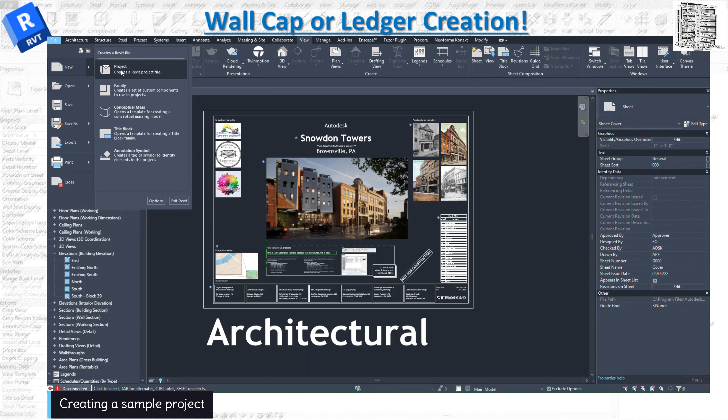Let's start by opening a new project using a template. Let's wait until it gets opened up. This is just a regular thing - I want to have a floor and a wall on top of it, just something very simple. I'll use just an architectural floor, a generic 12-inch floor.

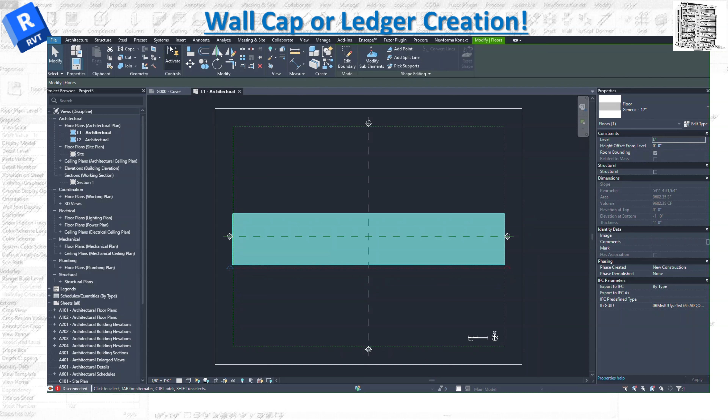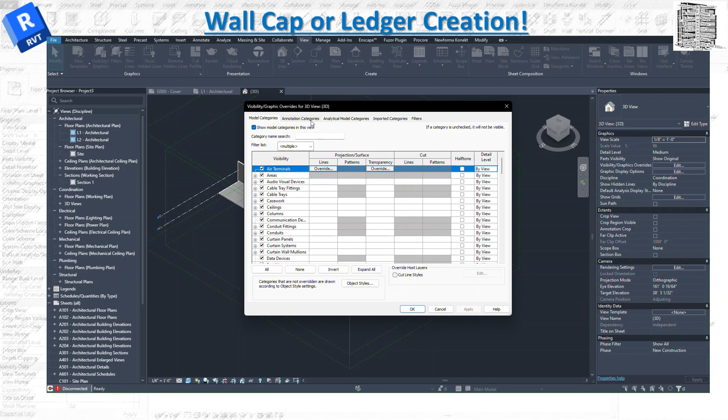I want to go to the architectural tab and get a generic wall, like an 8-inch wall, and put it right in the middle. This gives me the shape of the wall and the floor we can use, and you can see it in a 3D view how it's going to look. I can go to shaded view, so you can see the floor with the wall. If you don't want to see any annotations or scope boxes, you can uncheck the box to remove the annotations for a clear area.

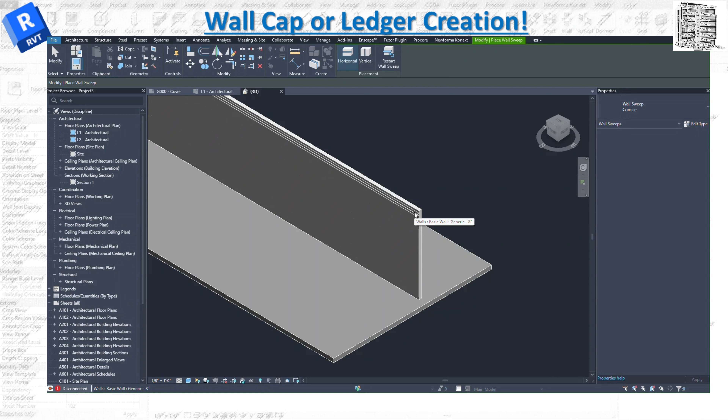After that, I want to go to the wall sweep. The reason we can use this, if you have a straight wall, is it's easy - you can use the modeling place to add some capping to the wall, which is easy for a straight wall. But I want to give you a tip and use the roof fascia to basically create the capping.

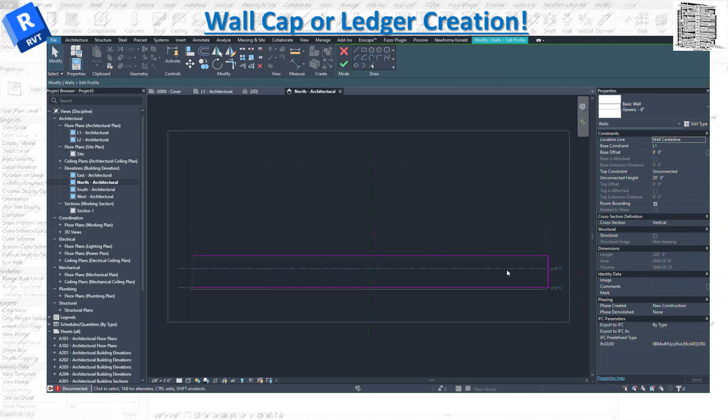Right now I want to show you how to create basically a sloped surface or wall. I can go to one of the elevations, select the wall, and edit the profile. If you want exact dimensions, you can get those, but it's really easy here - I just draw this line and delete the other ones. Pretty easy, so there you go.

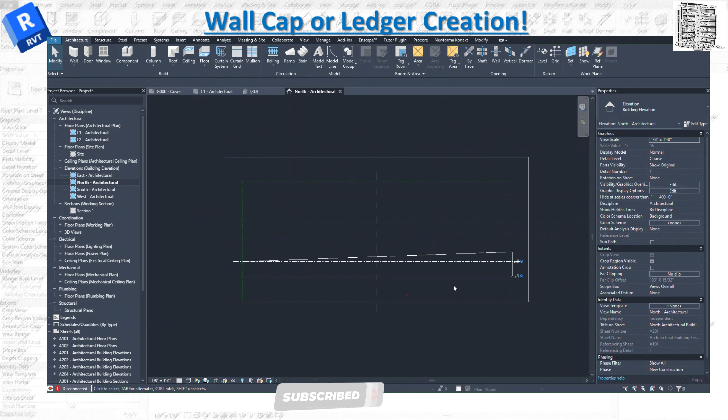So our wall got sloped. If you have more dimensions, you can get the dimension properly and get that slope. This is our new sloped wall, and it's a little bit harder to put a cap on top of this. You can extend this to any other application or any sloped surface where you want to add a capping, ledger, or anything - you can use this method.

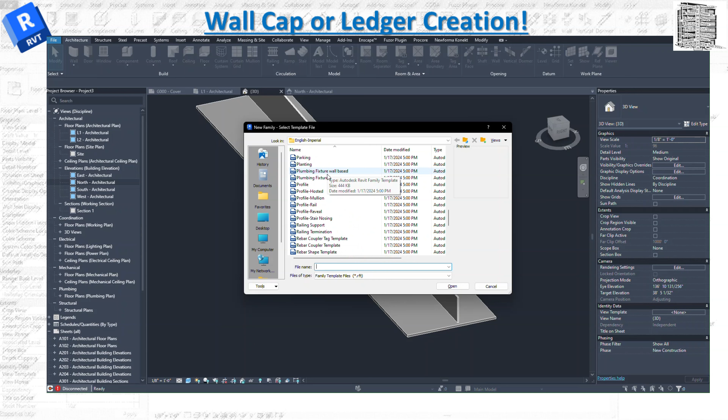So in order to do that, I want to go to the new family. Let's select the right family, because we need to create a new family for our cap. I want to use this because I want to show you can create any shape with any dimension that you want. So for profile hosted, we'll go to the families.

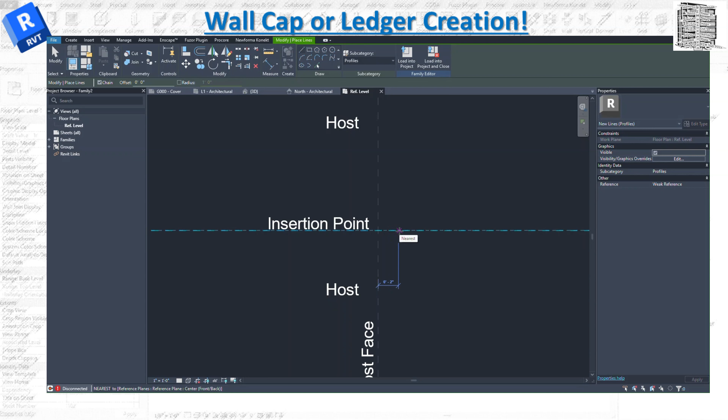So that's the insertion points, and that's the exact point where we can have our model line when we select the plane, which we'll get to. I want to have a little bit of overhang on the side, so let's just start from about 2 inches on this side, and I want to go all the way up.

So this is the shape that I want to have on top of the wall. I just want to draw something over here. There you go, okay, so this is what I want to take over there.

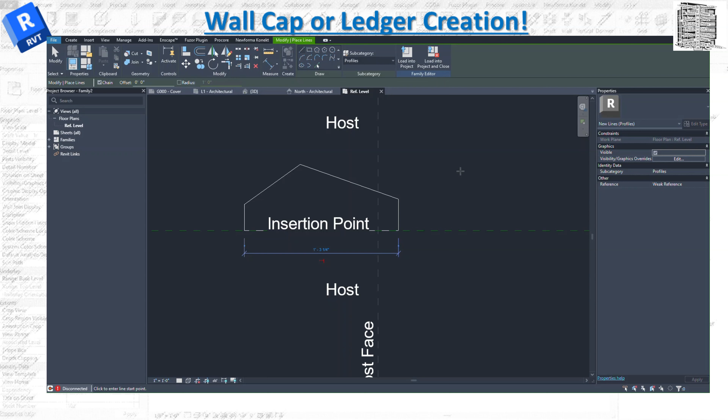After this, I want to load it into a project. Just be careful if you have many projects open, make sure you load it into the project that you want. So I have 2 projects open at this time, and I want to go to project 3, which is the one I'm working on right now. So that's going to be loaded into my project.

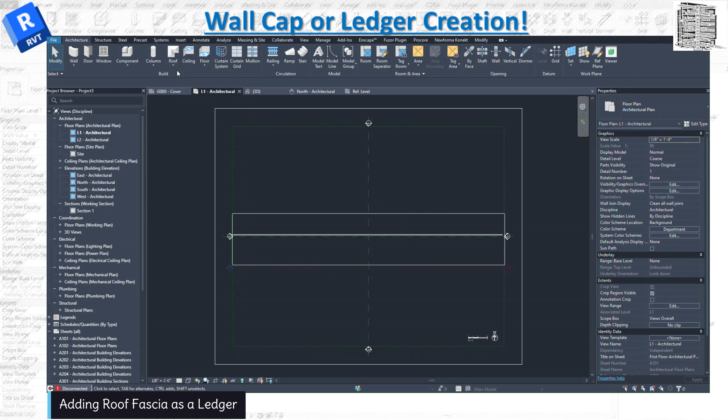Right now I want to create a roofing. So I want to go over there, fascia, select that one, because I want to create the edge for any surface. This is a great tool to use to create that.

So in edit type, I want to duplicate this and put a new name on it. Let's just put 'wall cap practice' that we do together. So let me type practice, okay, and then hit OK. It's going to create a new one.

You can see that's our family, and this is our type that I have. Right now I go to the profile and just select the profile. If you have a lot of them, you can name it, but right now, because this is the one I just created, Revit called it family 2, so I grab that one.

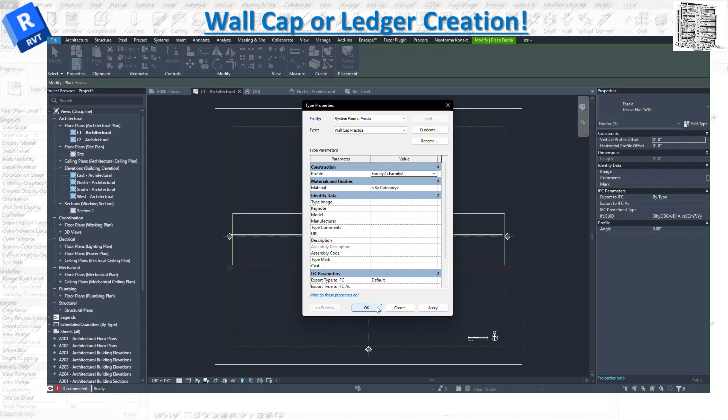If you want to change the material, everything is going to happen over here. Okay, so I have it right now in my properties.

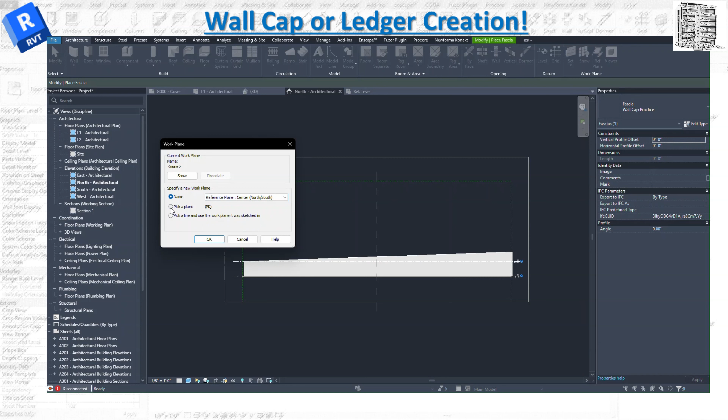Right now I need to create a work plane and then a model line so I can apply my roofing ledger to it. I want to go to the set, click on it, and make sure you select the correct plane. I'm on the north-south, just make sure you're in there, or you can pick the plane that you want to work on, because if I do L1, L2 it's going to pick the surface, so just be aware that we don't want to do the surfaces.

We just want to get basically just the wall. And this is all the different views—if you want, you can select that one. But at this point, I just want to make sure I go to set work plane, and then make sure that I select the north-south view. So basically it's going to be this view that I have.

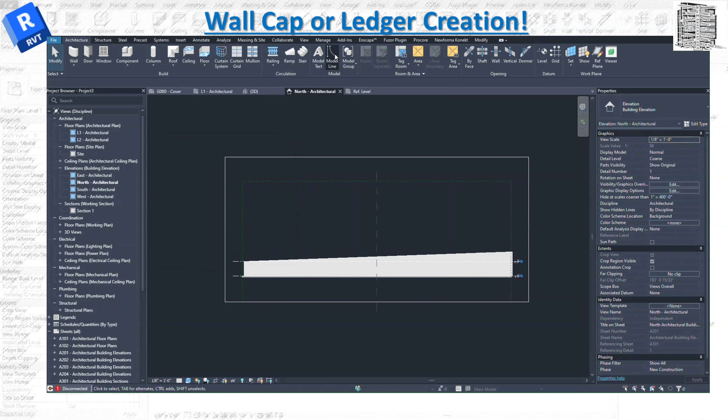And I want to go to the model line. Select over there, all the way to the other side. I can draw it, and I can look at it in the 3D view to see how that thing is going to apply. You guys can see the line over here.

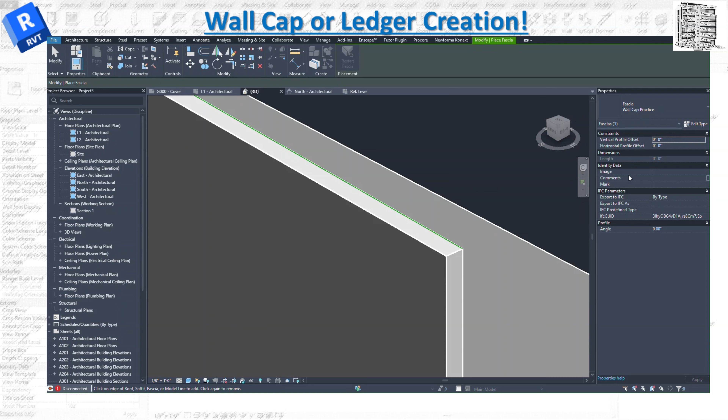Basically draw it exactly on top of the wall—that's our model line. Then I draw it, going from one side all the way to the other side of the wall. Right now I'm going to the roofing, fascia, and I have my wall cap practice, right? Select this, and there you go, basically adding that to the top of the wall.

And again, you can apply these to every single item that you have, and it's going to help you guys a lot.